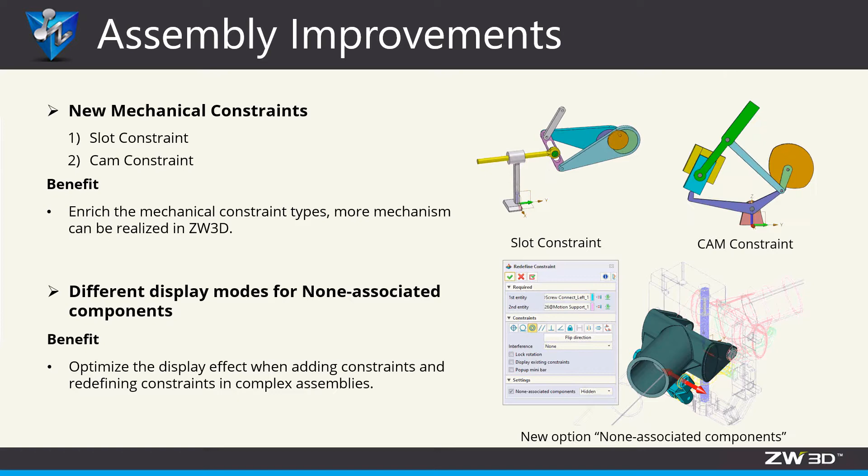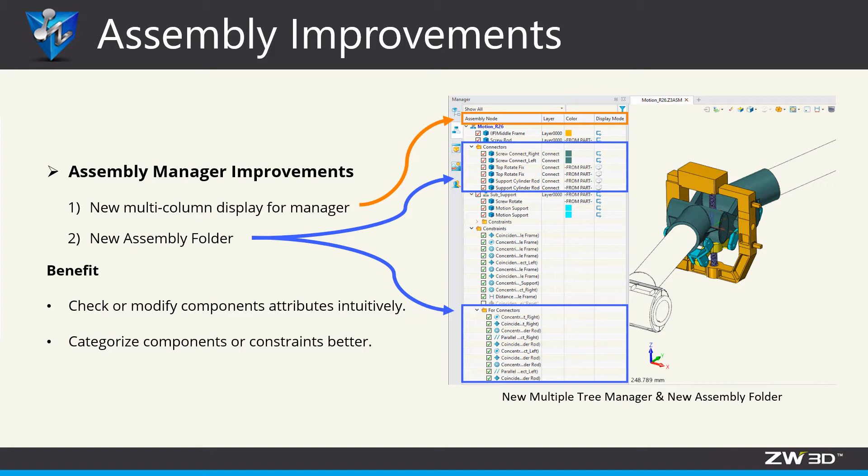Next, when adding and redefining constraints, users can select the display mode of irrelevant components. Last, ZW3D 2022 supports multiple column attributes and assembly folders. Now, let's see the details one by one.

Slot constraint. Let's see how this assembly can move now. The rod can be moved back and forth, and the handle can be turned around.

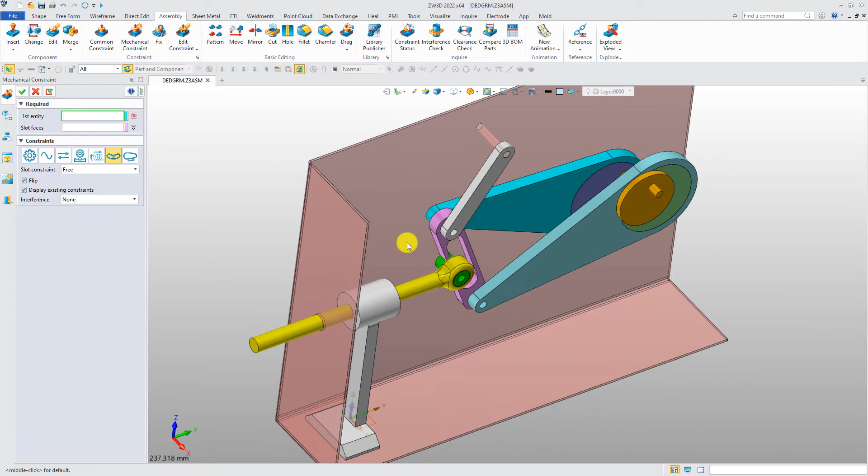Add the slot constraint. Pick the cylindrical surface and the slot surface. Click OK. Now, rotate the handle. The entire assembly is integrated together.

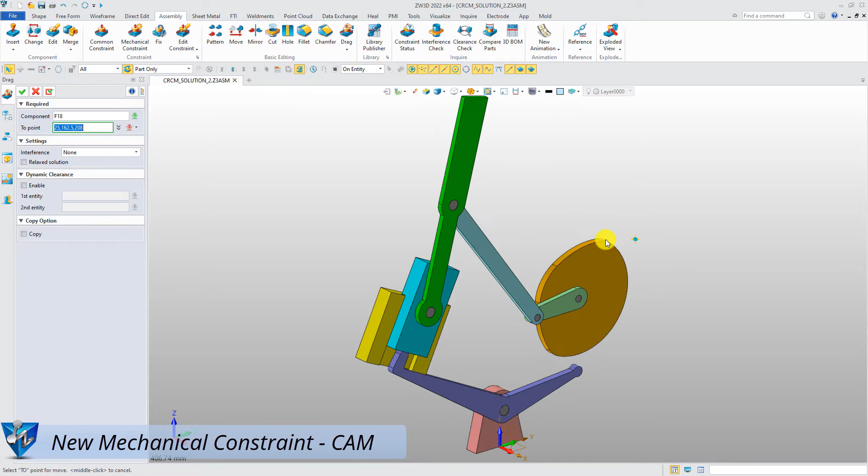Cam constraint. Similarly, let's see how the components move now. Add the cam constraint. Pick the cylindrical surface and cam surface. Now, the cam constraint comes into effect.

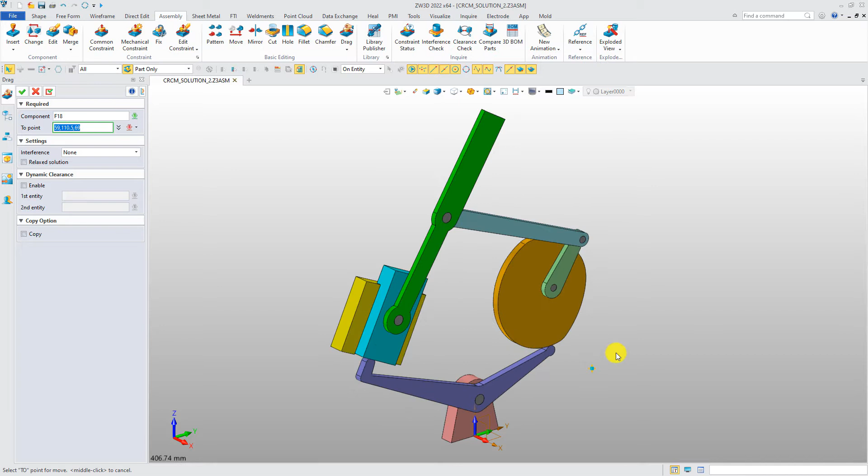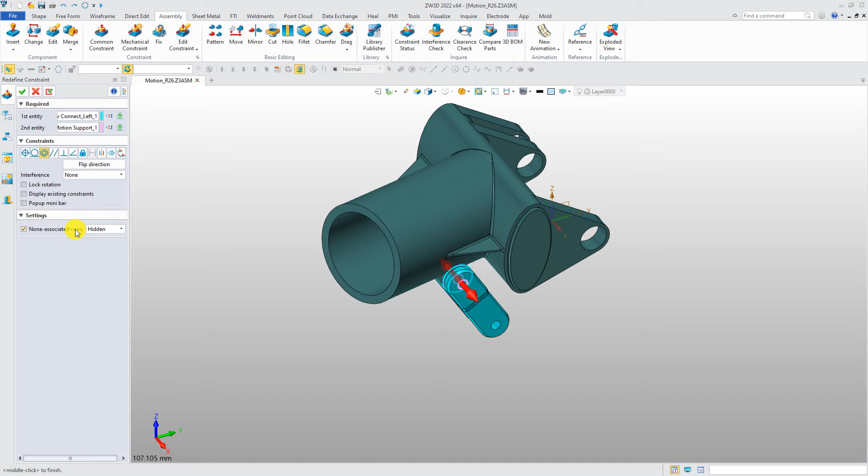Next is the new option, non-associated components. Redefine a constraint. Tick non-associated component options. The irrelevant components will be displayed in other ways, such as hidden.

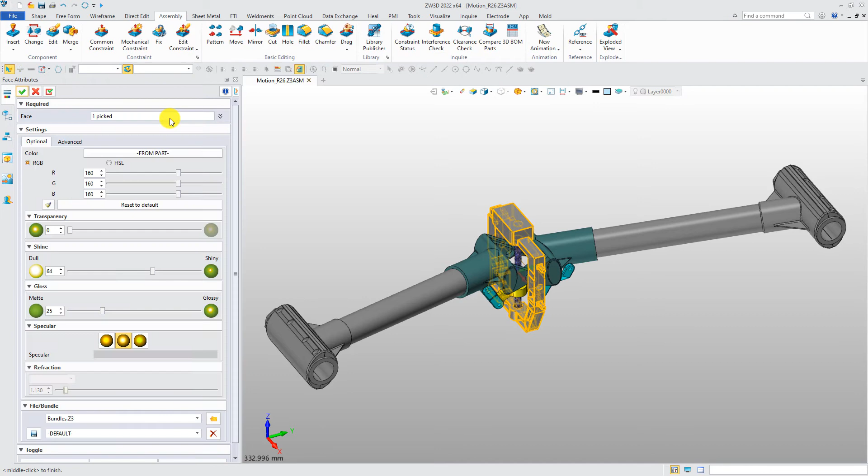New Multiple Tree Manager. Right-click Assembly Manager and open Attributes Manager. Users can select which attributes of components display in the Assembly Manager. Users can view and modify these attributes more intuitively, such as color, display mode, etc.

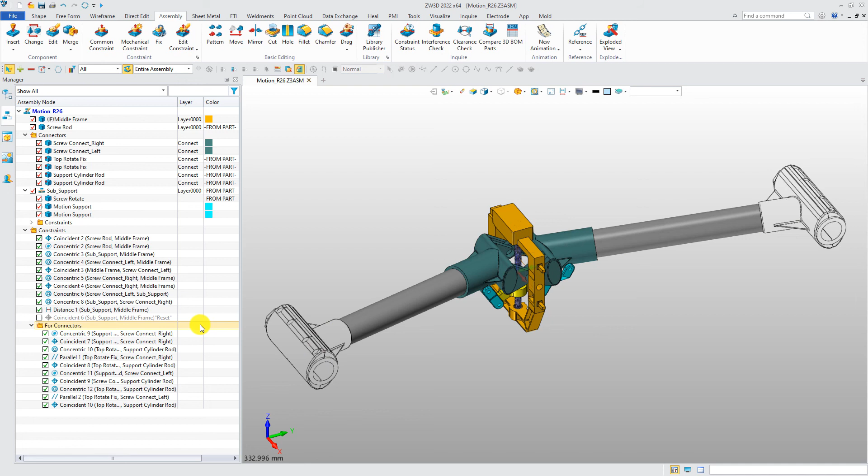Finally, there is the assembly folders, including component folders and constraint folders, which can help users better manage the assembly structure tree. With all these assembly improvements, users can do the assembly design more conveniently and efficiently.